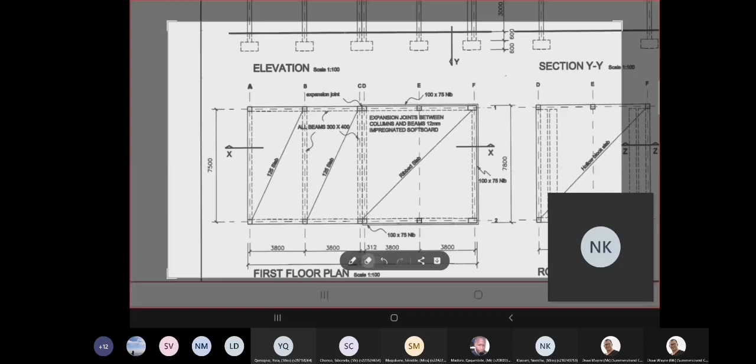The beam sizes, we can see, we take off the column. It says to us over there that all the beams are 300 by 400. What is the 300? The 300 is the width, and the 400 is the depth. That's given to us there.

We make our way further to the opposite side to where we have our trough slab, and on our trough slab we will then see, when we look at the detail of my drawing at my trough slab, that we have a deeper section over there, and that deeper section then shows us, because of my slab, what was the thickness of my slab that we had determined there?

The thickness of my slab was shown separately, where I had a 125mm slab, where I had my ribbed block slab, and I had a thicker slab on my trough slab, which is given to me, as I can see, as 300 thick. And the 300 thick I get over there.

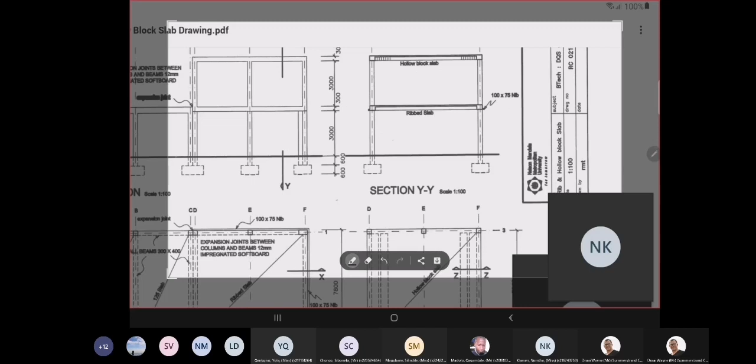So now I will work out my beams, and I will do my beams, and I can just go through. I can do collects, but there's no real need for me to really do collects, because yes, I can do the collects, but as I say, there's no real need for us to do them, as it is not that many that we are needing here. I'm going to go out, and I will go into my dimensions for my beams.

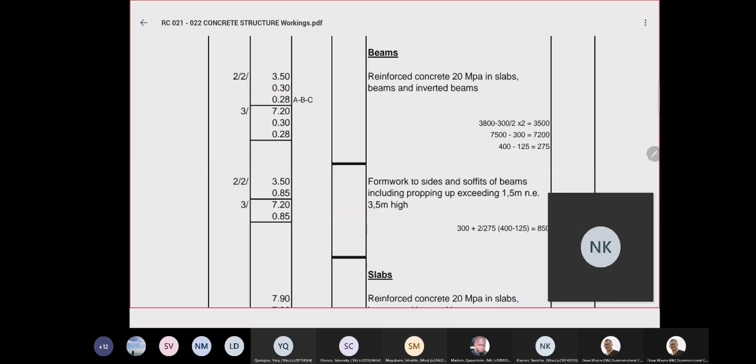There we can see my beams, and I say reinforced concrete, 20 MPa, 19mm stone in slabs, beams, and inverted beams. And just as a measure for whoever checks my work, I will now do the following. When I write that reinforced concrete 20 MPa 19 millimeter stone in slabs, beams, and inverted beams, I then underline it to indicate to whoever will be checking my work, so that person can understand that I am now measuring the beams. What is underlined will indicate to whoever reads or checks our work what it is that we are measuring, and here we're measuring the beams.

And I will now look at my dimensions for that. I'm going to go back, and I unfortunately have to go back to the drawing. I have to jump between these two, where when I look at my beams, first and foremost, I will work on the horizontal.

But now what do we do? We've taken our beam dimensions, we've measured, because our slab, where did our columns go? Our columns went to the underside of my deepest beam, right? So I want to measure this, and when I look at this, I will measure my beams from there to there.

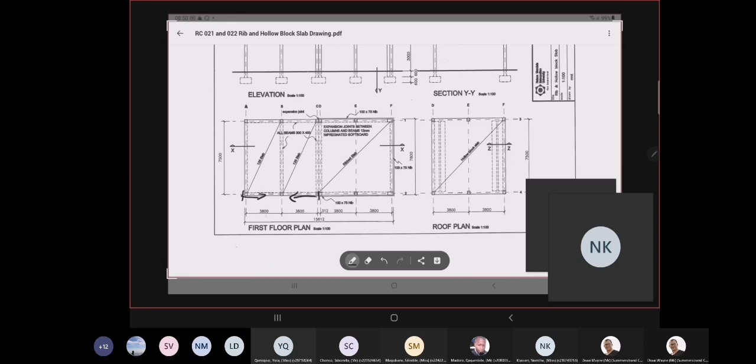What are my dimensions that I have? I see 3800 plus 3800. So if I have 3800 and 3800, that gives me 7600. So my overall length would be 7600 times whatever the girth of my beam is.

And when I look at the design for my beam, I notice that I know that slab is 125 millimeter thick, it is given to me from there. I know that this here is 300. And I also know that that over there is 400 thick.

So what is that? It tells me that it is the 400 minus the 125, which is the slab thickness, and that gives me 275. So it tells me, and I'm going to just write on this, fill the drawing here with my own notes. So I have 300, and I have 2 by 275. 2 by 275 gives me 550. That gives me a girth of 850. So it will be that multiply by that.

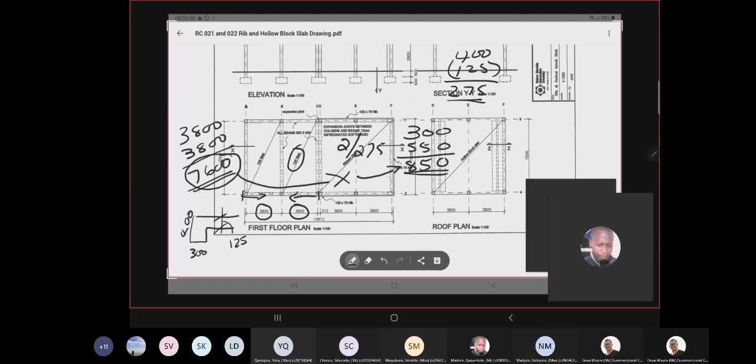Let's say it will be that, multiply by that. And we have 2 of those. All happy with that?

Can you see what I've done? If I now go in another color, just to show where exactly it is I'm talking about, that and that. And that is why we use pencil crayons to indicate. So that's now what I've done here. All happy with what I've done there? You can see that.

0.85 times 2, so I have, okay. Then I now need to also do, let's use a different color.

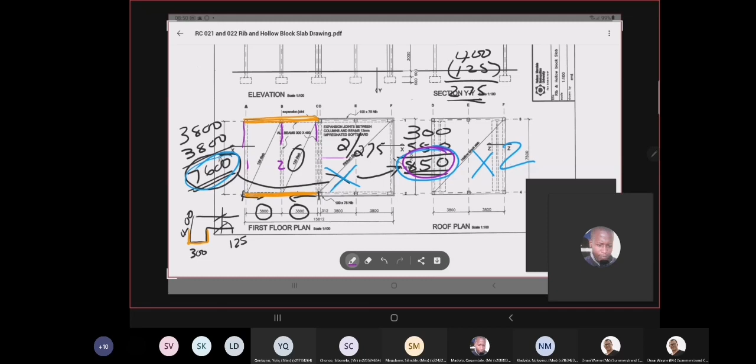But my girth is not the same over there, there, and there. In actual fact, my girth for that one, my girth for 3 would be different. Is that correct? Or would my girth be the same? Yeah, in actual fact, it would be the same that we would measure here. So my girth there would be the same.

So with those 3, what are my dimensions? I need to clear some of this stuff here. Okay, so when I look at this now, I have 7 meter 500. Where does a 7 meter 500 take us to? I have that 7 meter 500.

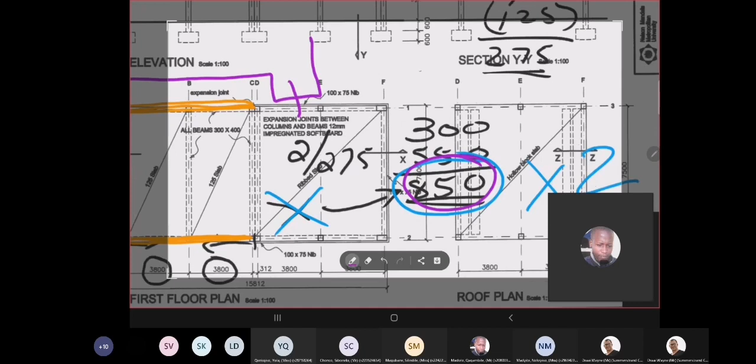That 7,500 takes me to that 7,500 takes me to the center of my beams. Can you see that there? If you can blow that up. 7 meter 500, does it take me to the center? Where does it take me to? To the center. There you can see. It takes me to the center of those beams. Right, so it takes me to the center of the beam.

So what is the size of those beams there? My size is 300. My size there is 300. So take it to the half. It's 300 divide 2. That gives me 150.

And I've got to multiply that by 2 again. So in effect, it is the 7,500 minus, oh no man, what minus? The 7,500 plus 2 times 300, divide 2. And that gives me 7,800. All agree with that?

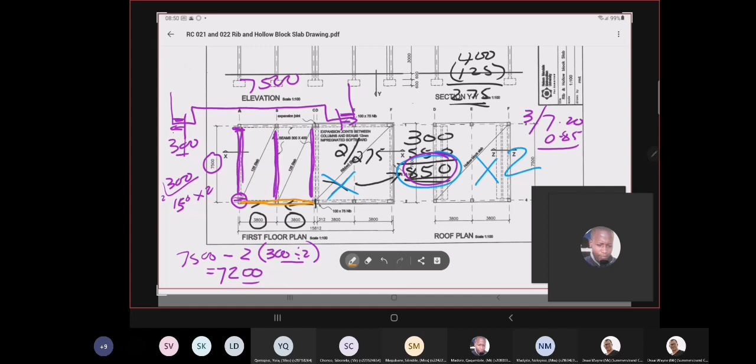Right? So I now would have covered that and that. That is what I would have covered. But when I look at this, I have covered, but what about that section there? And that section there, all the way around.

Shall I measure this here? Shall I measure this here with my sides and soffits of beams, or shall I measure it at another time? I can, of course, measure it right here. I can measure it here, whereby I would then, okay, if I can then just say the other one was, we said 7 meters 600, right?

7.6 times 0.85, and that was times 2. My beams in the orange. Right? I can now go in and I can say, right, it is 7.2.

No, do it elsewhere. I can say 7.2 by 0.13 by 2. And I can say 7.8 by 0.13 by 2. And that will then take care of that section at the edge of my slab all the way around. Are we happy with that?

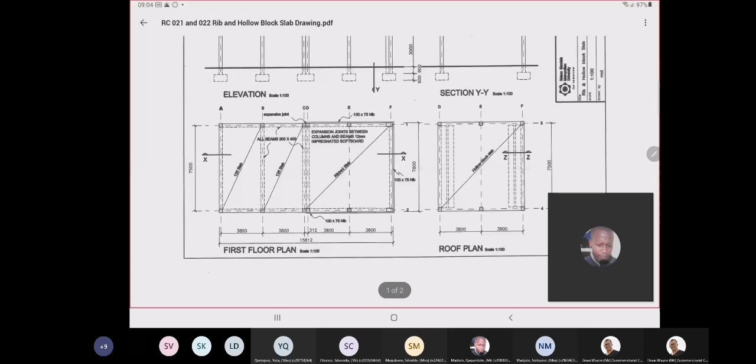I'm just putting it together there because all of that refers to the 125 ribbed slab. It refers to that section because when you look at the drawing, when you look at this section further, when looking at this section on the drawing, you would notice that here I have the beam, but I have no beam that side. That side, it's just a slab. Okay, that's just a slab. So I dealt with everything on this side where that refers to the beam, and that's why I've done it there.

But you can keep it separate. You can come back later and measure that like how we've done it previously. It does not matter, as long as we bring all of those elements and sections that belong together when we do the squaring and preparing for the bill. I hope that answers your question, Madolo. Yes, no, it helps. I just thought it looked faster to just combine, but I understand your reason now.

You see, so I'm showing different ways of how you can do it. You can do it there, you can keep it separately, it is entirely up to you as to where you want to do that in. Okay. Understood, sir. Thank you.

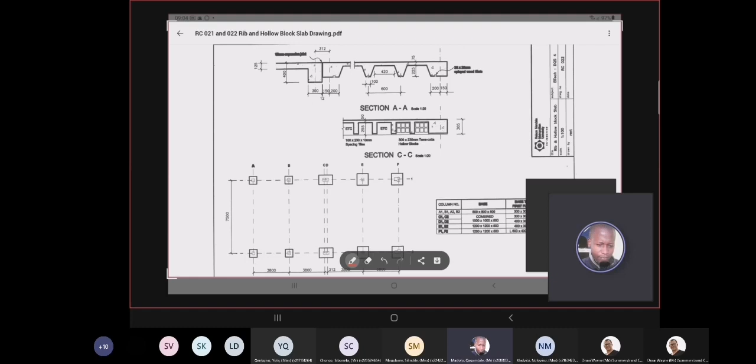Okay, so what I've done, I've just done everything over there for the beams, because on this side we have no beams. Okay, that's how we have no beams. So we finish everything on that one side, and because the two slabs are separate, are different, when we also go in and we will now measure the slab for that section.

We will now measure that slab and indicate on that slab: reinforced concrete 20 MPa, 19mm stone in slabs, beams, and inverted beams. This time we will underline the slab section. But we also need to take into account, going back to my previous section, the category of where my beams would fall in. I notice the height there is 3000.

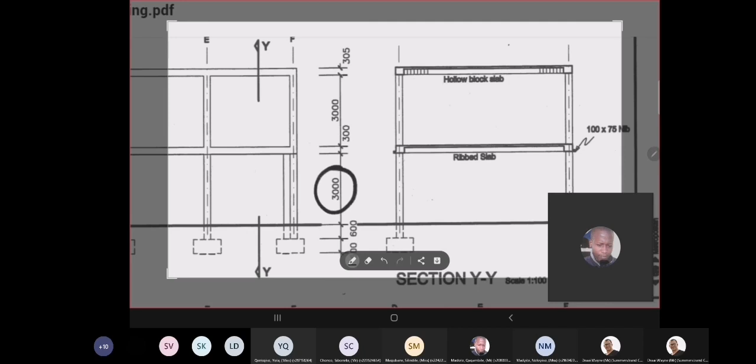That is from reduced level. The height is 3000, and I know my beams are 400, so it will fall in the category of exceeding 1.5 and not exceeding 3.5 meters from bearing level. What is my bearing level? That there is my bearing level. My bearing level is the ground level, and it's 3 meters, so it falls in the category of exceeding 1.5, not exceeding 3.5 meters from my bearing level.

For the columns, we measured my bearing level. Where do we measure my bearing level from for the columns? We measure that from there. Right. And now we're looking at the slab, and we look at where it is that we will be working from. I will measure my slab over my beams, and I have my dimensions here.

We said that dimension there is 7,500 plus 300. No, not deduct. 7,500 plus 300, so it's 7,800, and we'd multiply that by the 7,600, which is made up of the 3,800 plus 3,800, which gives me 7,600. And with my thickness there, 0.13.

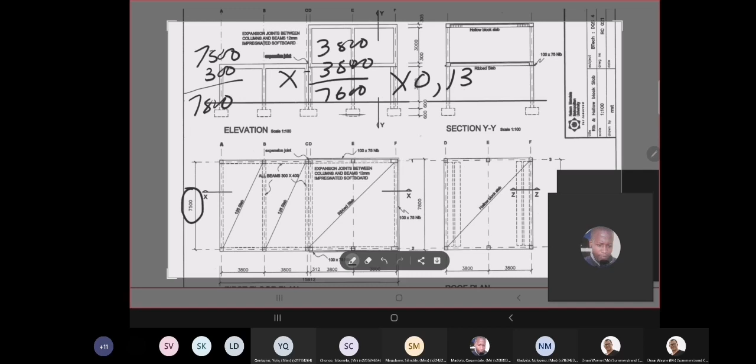The dimension there is, yes, it's a 3. If I go in and blow this up, I'll just pick this up here now. If I blow this up, it shows that this also goes to the center, meaning that I would also have to add 2 times 150 on there. So I need to say 2 times 150. That then brings that to 7,900.

I made a mistake, and my apologies for that, guys. That dimension there is 7 meter 900, and it means that the overall length here would then be 7,900 multiply 0.85 times 2. That is for the beams. And also the 7.90 multiply 0.13 times 2. My apologies, guys.

I hope that you understand what it is that I'm pointing at here. I have not taken the dimension there shown that the dimension goes to the center of the beam, and I disregarded that. I did not take that into account. You guys with me? You guys see what it is I'm talking about? Please show by a thumbs up or raise your hand if you have a query, if you're not happy with that. All right, thank you, guys.

My apologies once again. So my dimension for my slab, the reinforced concrete slab 20 MPa in slabs, beams and inverted beams will be 7.9 by 7.8 by 0.13.

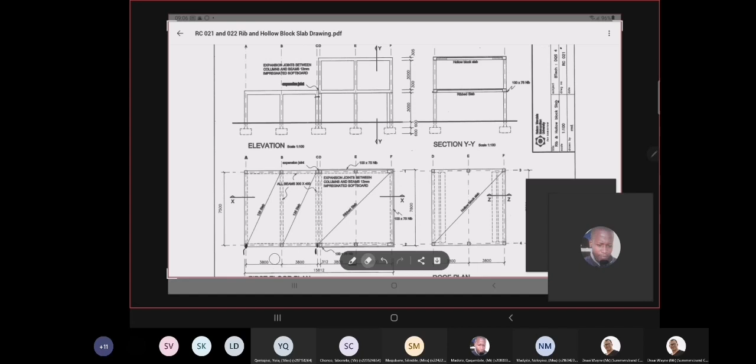And we then have to look at the formwork to that. The formwork to the soffit of my slab, including propping up, exceeding 1.5, not exceeding 3.5 meters high, would therefore be, we would then use the dimensions that is shown as 7.9 by 7.8, and we would then deduct.

We'd go in and we'd say deduct ditto. And what will that ditto refer to? The ditto, because we would be measuring over there. That is where I'd measure from for that dimension there. It is for the section, but I also need to deduct, and I'm going to change the color of what it is I need to deduct.

I don't need to deduct that. I need to deduct that. Whatever is marked in purple, I need to deduct that. Why do I need to deduct that? Because I have already measured the formwork to the sides and soffits of my beams. So I now need to deduct that from my dimensions of my slab, because otherwise I'll be over measuring.

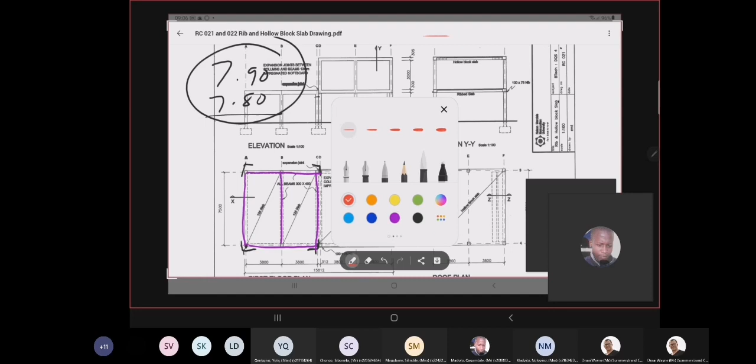So what are my dimensions that I do have? What we will be deducting, oh, let me do that in red. What I will be deducting is the following: it will be the 7.9 by 0.3 by 2, and it will be a 7.2 by 0.3 by 3. That is what I will be deducting from this dimension here, the dimension of this for the soffits of my slabs. That is what I will be deducting. All clear on that.

And my dimensions there would fall in the category of exceeding 1.5 and not exceeding 3.5. Okay, that is that.

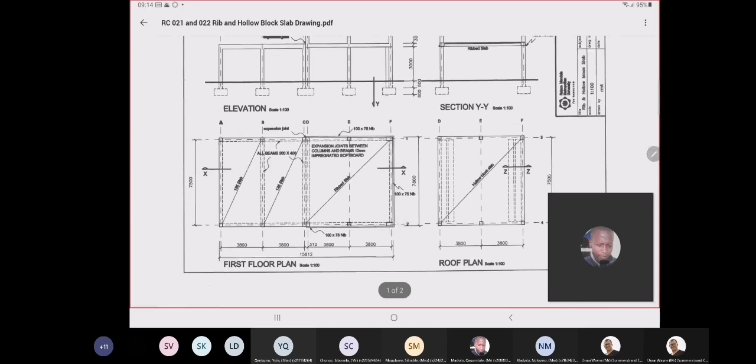I now need to measure the ribs because this is a ribbed and block slab. It is a ribbed and block slab, and the information given to me, I will find over here. It tells me that that is a ribbed and block slab. No, that's not a ribbed and block slab. That is just purely a straightforward concrete slab, reinforced concrete slab.

So when I go over to my other side, to my next side, this is where I would notice the following: that I have over here my trough slab. So now I see we have three different setups of slab. So when we go in and we measure for my trough slab, we will go in and we will have a look at how best it would be to measure this. When you state this, that it will be the following in trough slabs.

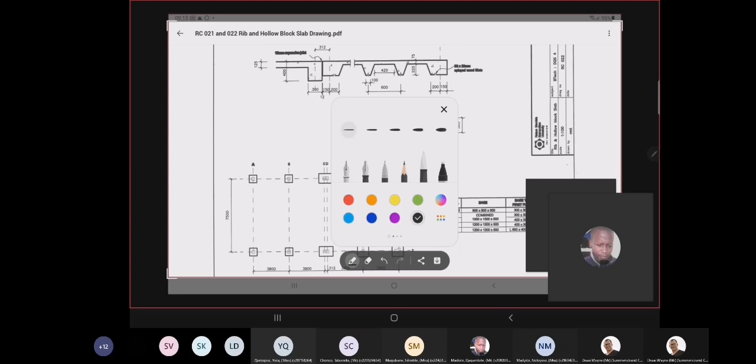The following is trough slabs, referring to the reinforced concrete in this slab. That slab and the thickness of that slab is 300 millimeters. In that slab, when I show this on the drawing, it will refer to that slab over there.

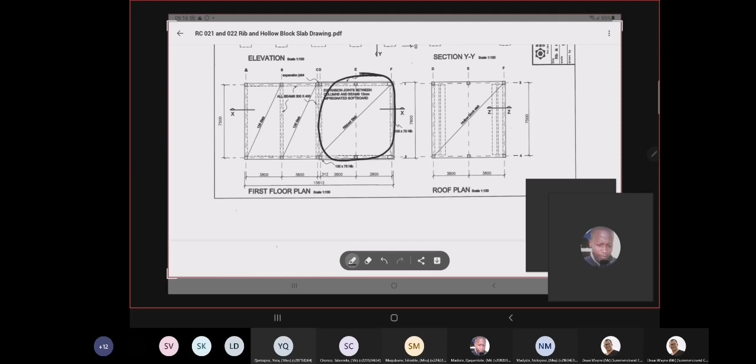My trough slab, when I now go in and measure that, my description would read reinforced concrete 20 MPa in trough slab, including beams and inverted beams. I have to state that. So my overall dimension for this slab, when I look at my dimensions and blow this up, I'm sitting with the same scenario where I now have to measure from there to the outside there.

And again, it would now be 3,800 plus the 3,800, and then also plus the 300, because those dimensions take me to the center. And the same dimension to the other side, so it would be my 7,900 multiplied by my 7,800, multiplied by 300.

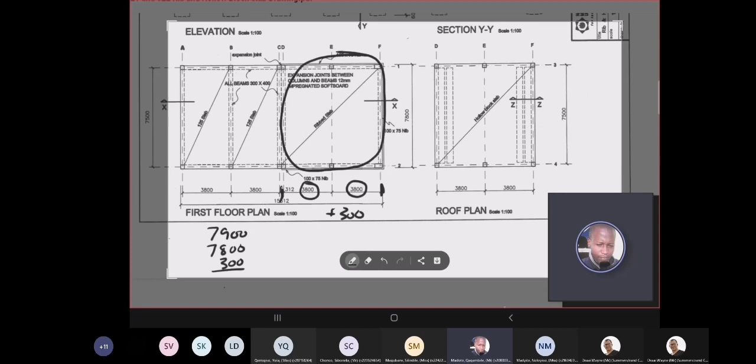Excuse me sir, yes Madolo? The 312, that is next to where you have circled your 3,800. The 312, yes, what does it refer to? Let's go in and have a look. If you see where your two different slabs are meeting, there's a 312 over there.

That gives you your centers. It's not 300. Can you see my drawing there, Madolo? Yes, that 312, I'm asking about that. Now what does that 312 refer to? That 312 says that the distance from the center of this beam to the other side there is 312. Okay, what does that refer to? The distance between the two centers, it just gives you the distance between the two centers.

Yes okay sir, understood, you see that? Because this beam is 300. Yes, you with me? Yes sir. And so that 312 is just there to show that it's a distance between the two centers.

Yes, and the beam on the other slabs, I see a 150 and a 200 there. That's sure, 150, that just shows the dimension. The 150, 150 and the 200, and remember later on where we will now start measuring between the centers when we measure for our trough, to determine what those centers are, what we would add on either side. Remember that then comes into play there.

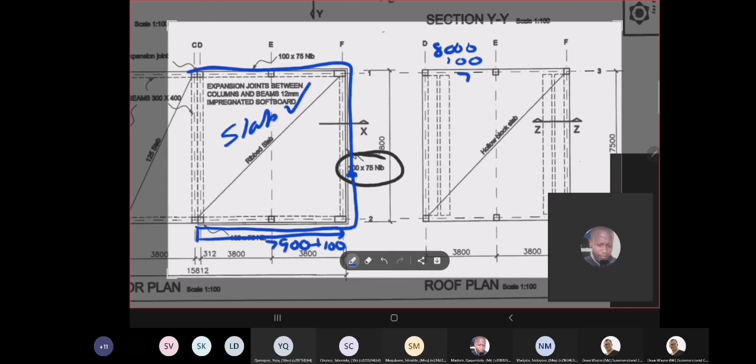So it will be 8 meters multiplied by 0.1 and multiplied by 75, and we have two of those. If we rewrite those, it will be reflected as follows: 2 times 8 meters for my nib, times 0.1, times 0.08. And that will take care of that nib that side and that nib on the other side.

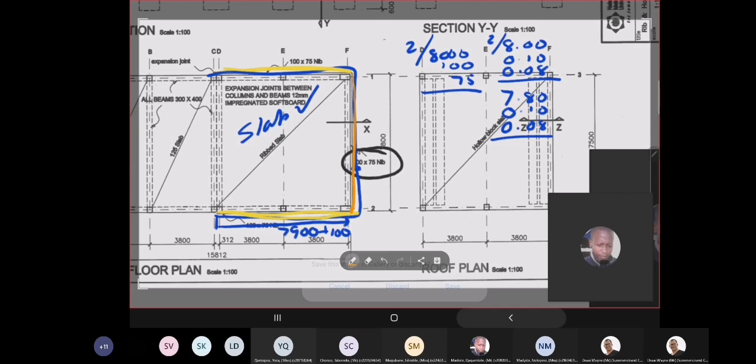I then go in between, and what are my dimensions as I go in between? My dimensions going in between would now be as follows: for my vertical, it would be 7.8 by 0.1 by 0.08, and that will refer to that nib that goes in between. It's also concrete, remember, it's the same strength concrete, the same size stone concrete, and it forms part of that slab. So, but now I need to deduct for these troughs.

And I need to deduct for these troughs, those. I need to deduct for those troughs in there. And how do we arrive at those dimensions for those troughs? How do we arrive at those dimensions when looking at those troughs?

I take my dimensions and I have my overall dimension of 7 meter 800. But all of you remember the question you asked me about that 350. Yes sir, now this dimension.

You will have that all the way around your slab, if that is the slab. You would have that 350 all the way around with your troughs as a soffit, almost like a beam that is being created. Okay, now I see. So that 350 would be all the way around.

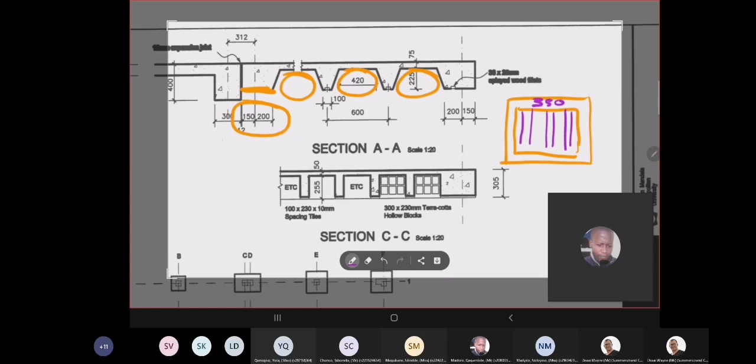So what do I need to deduct for the length of those troughs? I have my overall length of 7,800, and I need to deduct 2 by 350. Deduct that, it gives me 7,100. So the length of my trough is 7,100. And what is the dimension for that trough?

What's the dimension for that trough? I now know that over there it is 420, and over there it is 600. So if I draw my

trapezium, it will therefore be 420 plus 600, divide by 2. That gives me 1020 divided by 2.

No, whoops, not that. It's not 600, it is 500. Why 500? Because 600 takes me to the center and it shows that that is 100 and 100. So I will have to say 600 minus 2 times 50. That's in the center.

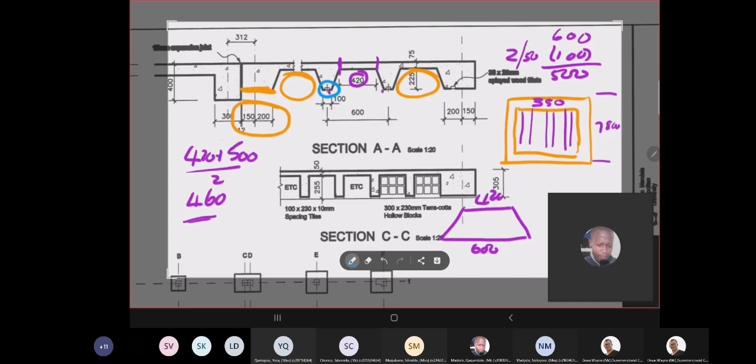Referring to this section over here, where the 100 shows me the width of the beam, and it also shows that the 600 goes to the center of those beams. So I need to get the dimension to there and there, which is then between the two blue marks, which is 500. So this is the 420 plus the 500 divided by 2 gives me 460.

And when I show the deduction of what it is I need to do, I've determined that it is 7.1, the length, multiplied by 0.46, and I have my depth there given to me as 225, and that is 0.23. But how many do I have? How many of those do I have?

In order to determine how many we will have to show, in order for us to show how many we will have between that line and that line, I will have to deduct, or I will have to take my overall dimension, which we had as 7,900.

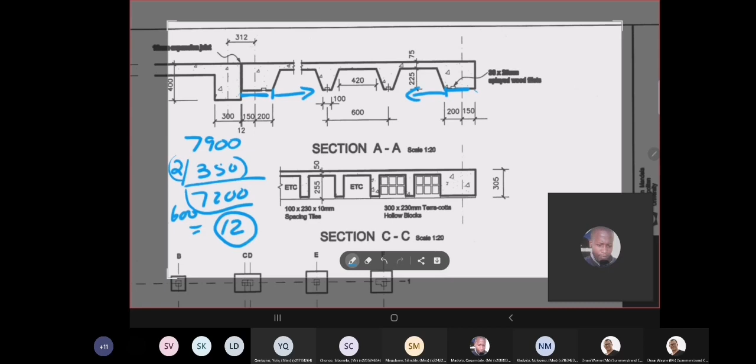Because I was not given how many troughs we have, I will have to determine that, and I can determine that because the 600 given there is given to us from center to center. If we were told how many, we could have used all those dimensions to add, like how we would have used that with our ribbed section. So it is 7,200 divided by 600, and it gives me 12.

So my dimensions that I will be using here would be 7.1, 0.46, 0.23, and I would have my deduction of 12. So we have 12 troughs that I will deduct from there. Right? Let's go.

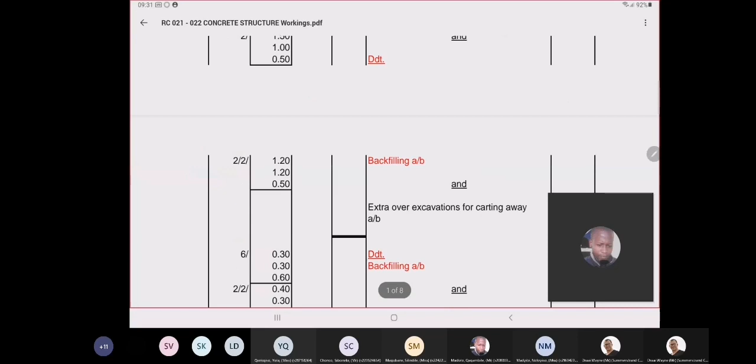So when I now work with that, I've now done, and I've now sorted out the concrete that goes into my trough. For the formwork, I'm going to go out to the working for my formwork. It shows us there that it's formwork to the soffit of the trough slabs exceeding 250, not exceeding 500 millimeter thick, including the rib size of 100 millimeter wide.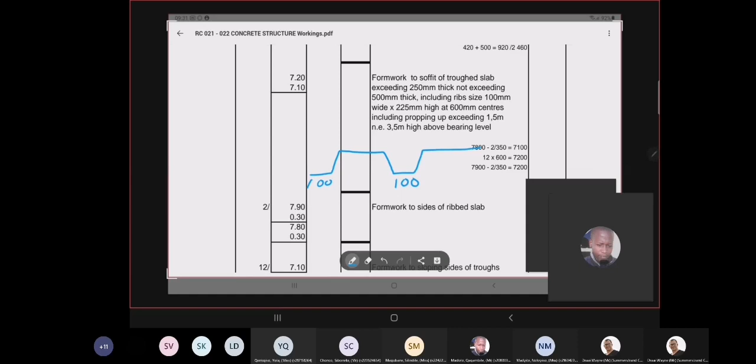Where do I get that rib size of 100 millimeter wide? That is given to me on the drawing, it shows as 100 millimeter wide by 225 millimeter high at 600 millimeter centers. So that tells me that that is 600 millimeter centers, including propping up exceeding 1.5 and not exceeding 3.5 meters high above bearing level.

And then I'll go in and I need to determine what this area is. I'll then have to work out exactly what the area is of this for the formwork. Because I can then see there that I take my 7m800, which is my overall dimension, deduct the beam, if I can call it that, or the solid section all the way around, which is 350 by 2, it gives me 7,100. And the 12 by my 600 gives me my 7,2 that I had.

So meaning that it will be the 7m200 multiply by my 7m100. Or I can of course also show that up as it is shown over there, where I take my 7m900 minus 2 by 350, just to show that that is how we've arrived at it. I can take my 7,800 minus my 7, as I indicated earlier.

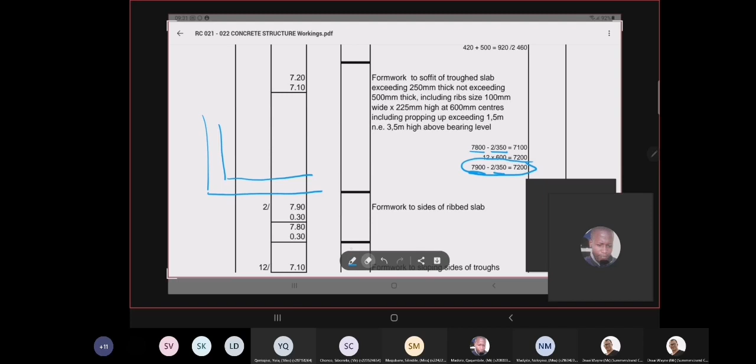I have my 350 all the way around, and that is 7,900, and that is 7,800. So I deduct the 350 times 2 from those two. That will give me my 7,200 multiplied by my 7,100 for the formwork.

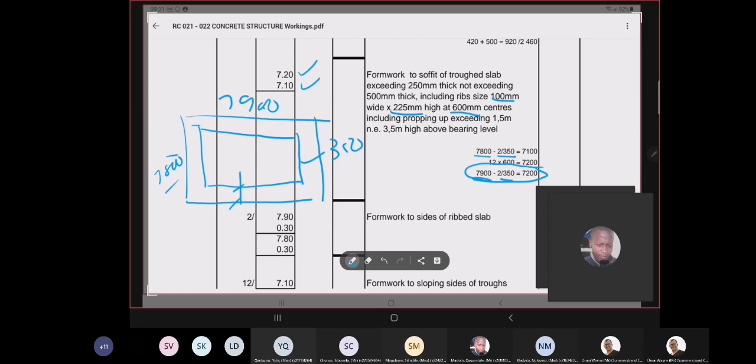Remember, it's important that we give the size. We tell what the centers are, what the height is, the rib sizes, and all of that when dealing with my formwork to my trough section.

And we will also now, for the sides of that rib slab or that trough slab, have our dimensions that we would have. Now you see that it shows here 7 meter 900, which is 7 meter 900 multiplied by 0.3 by 2.

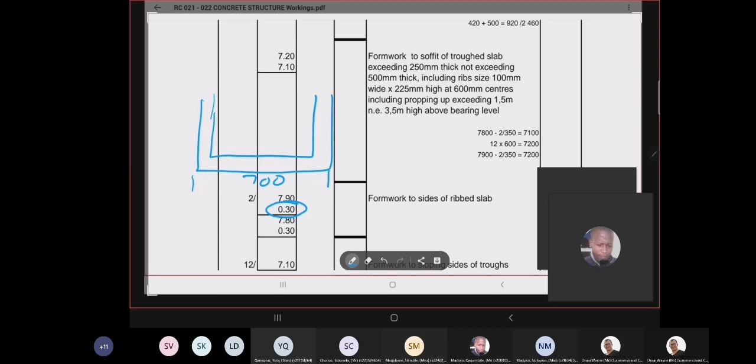Why 0.3? Why not 0.35? Anybody tell me why not 0.35? And why it reflects as 0.3? Anybody? Why do we have 0.3? It's very important for us to understand why we're using 0.3.

What were the dimensions that we had indicated for this trough? How did we describe this trough? We said that when we dealt with the formwork, the rib size is 100. Right? So what do we do?

Yes, we have that shown to us as 350. But where does it stop? Where does it start? What is that dimension there? It is 50 millimeter. Do you agree with me? Yes, that is 50 millimeter. And what does that 50 millimeter form part of? It forms part of the formwork to the trough.

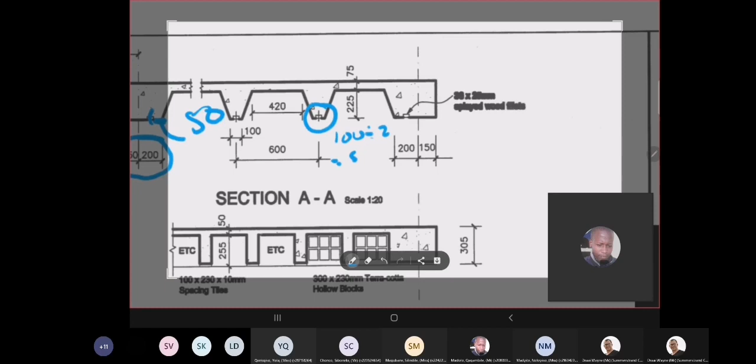Because we have 100 millimeter there. Part of that formwork to the trough is 50 millimeter. It gives us 50 millimeter there. That in itself tells us that we have the 350 minus the 50, that leaves me with 300 as my width all the way around. Are you with me?

Yes, sir. So my dimensions there therefore refer to that, and what it then says is on my horizontal, I would then have the 7 meter 900 multiplied by 0.3, and there's two of them because the two of them would then refer to that and that side. The 7,900 times 0.3, there's two of them, and then we have 7,800 times 0.3.

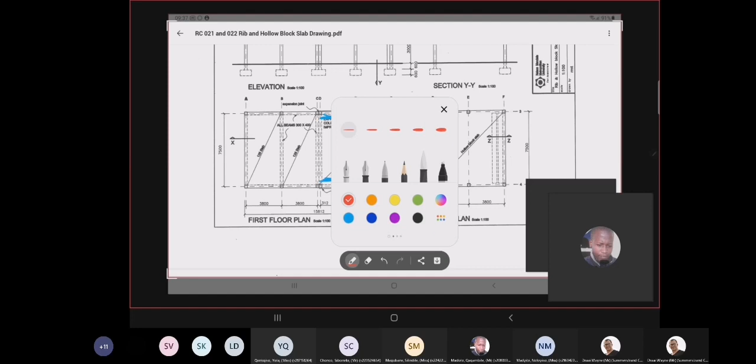Must 7,800 not say times 2? Does it reflect times 2? Must it reflect times 2 if I have a look at this drawing here? I think it should say times 3. Times 3? I think so. No, let us have a look at this.

What is my description there? It says formwork to the sides of my ribbed slab. We'll refer to that, and to that. Now, where does that show on my drawing?

Shows that my thickness there is 225, plus 75 gives me 300. So that is the formwork to the sides of that.

And how do I do? What do I do? Where do I measure the formwork to the solid sections? Do I measure that? Have I measured the formwork to this here? Have I measured that formwork? I've not measured that as yet.

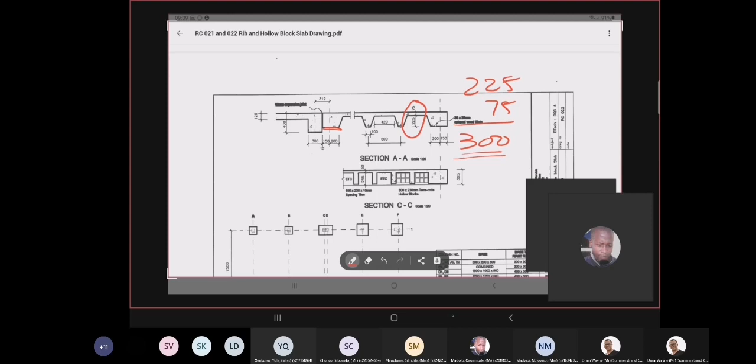So when I deal with the formwork to the sides of my trough slab, it will be the thickness that we are given, that we know is 300, and it will be at 7 meter 900 there, and 7 meter 800 that side. I've already measured that, that is done. We said that it goes up against the expansion joint, where we do not have to worry about measuring the sides there, because that is already measured over here, because that will go up against the existing slab there.

So formwork to the sides of my trough slab would therefore refer to the section on the side there only. And that's for my vertical.

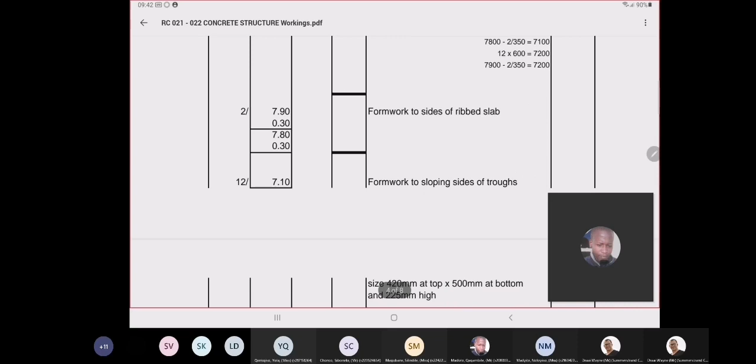Then I have my formwork to my sloping sides of the troughs, and the trough size is 420. We indicate the trough size that we give. When I go back to my workings, the formwork to my sloping sides of my troughs has a size of 420 at the top and 500 at the bottom, and we're giving the height. And we've determined by our calculation earlier on that we have 12 of those troughs. That's for formwork to my actual troughs.

We have the formwork to the soffit of the adjacent section. Adjacent flush surfaces, including the propping up, exceeding 1.5, not exceeding 3.5. We've already measured the overall dimension, so all we do is take that overall dimension and deduct the trough sides that we've measured. It's a 7.1 by the 7.2.

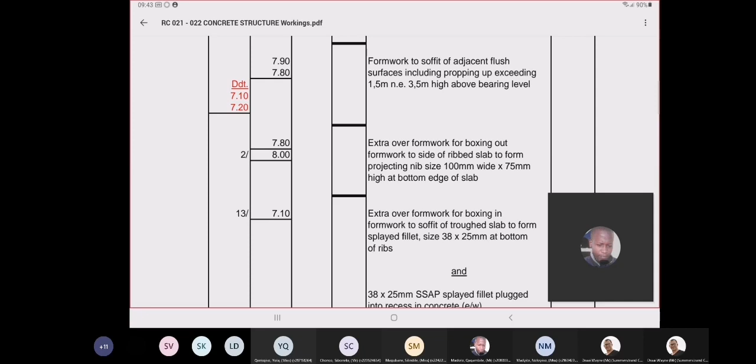That is a deduction that we would then ensure the remainder is taken care of. Now for my ribs, or my nib, the boxing out, we need to measure the boxing out, and the standard system tells us that measuring boxing out would be referred to as extra over.

Formwork for boxing in formwork to soffit of the trough slab to form a splayed fillet, size 38 by 25, at the bottom of the ribs. Where on earth? What is it talking about? Extra over, formwork for boxing in formwork to the soffit of the trough slab to form a splayed fillet, size 38 by 25, at the bottom of the ribs, and we also now measure 38 by 25 millimeters sawn South African pine splayed fillet plugged into the recess in the concrete elsewhere measured. What are we talking about? Let's go and see what it is that we are talking about.

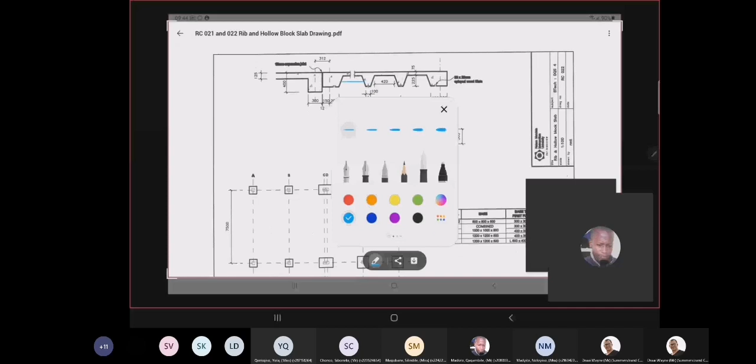Let's go and see what it is we're talking about. If we have a look at over there, and I will blow that up, that tells me 38 by 25 millimeter splayed wood fillet. See that there? And that splayed wood fillet goes into each and every rib of my trough slab.

That's where that description comes in, where we need to measure extra over for the formwork for the boxing in of those ribs, and it goes into each and every one. You can see there where we're all over. It goes on each and every rib or nib, so each and every rib.

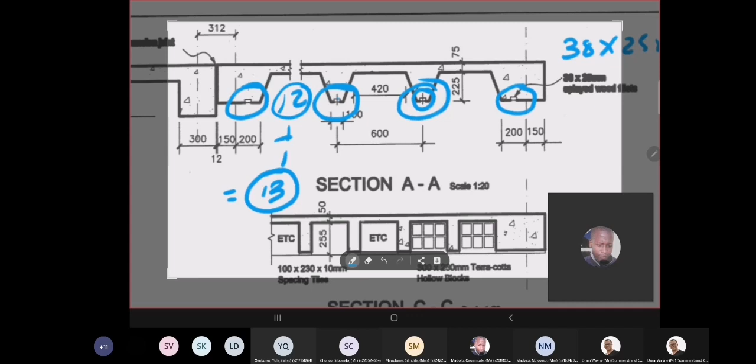Now, how many troughs do we have? 12. Meaning that we have 12 troughs, and that we should have one more of this boxing in splayed fillet, because we had 12 troughs, and the 12 troughs would refer - like if you hold your hand out, you should see the web between your fingers would be the trough, and the ribs would be your fingers. So if we have 12 of those, we would add 1, and that will give us 13 ribs or 13 splayed fillets that we would then encounter over here.

So my dimension there would be my length that I've given, the length that I have arrived at from using the 7800 and deducting the 2 by 350, which is 700, giving me my length of 7100, and I have 13 of those that we have over there for the boxing in - 13 of those with the extra over, measuring for the boxing in and also measuring the fillet that we need to allow for over here.

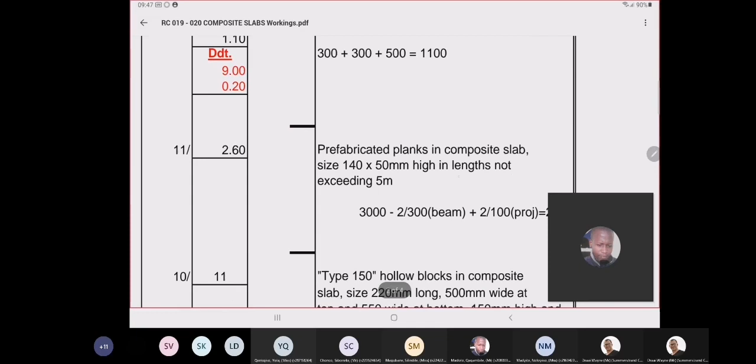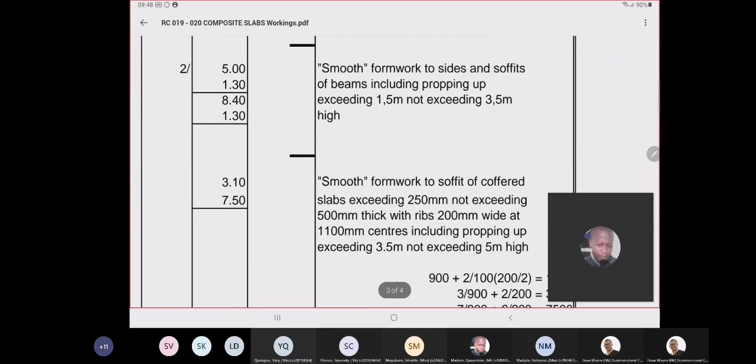Where's my fillet now? Oh, where am I now? Why haven't I missed my - no, I put the wrong drawing. No wonder.

Okay, then between my two slabs, between my 125 and my 300 millimeter thick slab, we will now have our impregnated soft board. The soft board is the expansion joint between the two slabs. Why do we have an expansion joint there? Because for any movement that should take place, it should be taken care of. And I have the 12 millimeter impregnated soft board in expansion joint between the beam and the adjacent slab, not exceeding 300 millimeters high, and that runs along the entire length of my slab, so the length there is 7 meter 800.

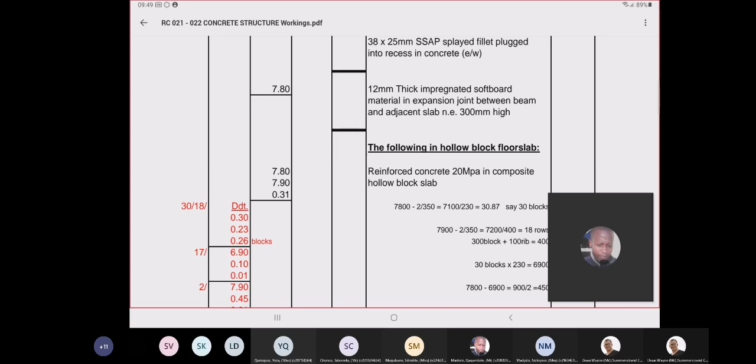Okay, and this is where things start becoming interesting now. Because going into and looking at my drawing, and taking us back to last week to where we had measured the columns - I said that, and Madola still gave me the answer. I said that we would then keep these columns separated from these columns. You remember that?

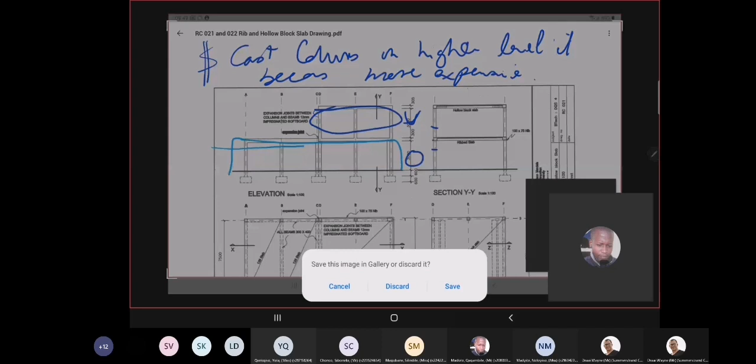And you said that the reason for that is because of the cost. You said that when we cast columns on a higher level, it becomes more expensive to cast columns over here than what it is to cast them down there. So it means that we measure for the columns on the two different levels separate from one another. Does that make sense? Makes sense for us to do that? To me, it makes a lot of sense - I think of Bob Marley's song, all this dread rock rasta, makes a lot of sense.

So I will now look at us measuring the columns up there first. And when we measure the columns to that top section, we now first and foremost need to determine what the length of these columns would be, what would those heights of those columns be, because these columns would now be placed from that level on up.

And I look at my drawing, when I look at my beams first - when I look at my drawing and I look at my beam sizes and I look at my slab at the top there, it tells me that I have a hollow block floor slab. Excuse me, I have a hollow block, and the thickness of that is given to me as 305.

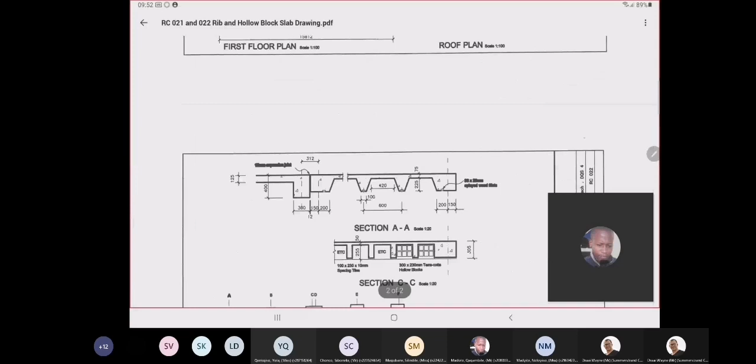Thickness there is given to me as 305. The height of my columns is given to me as 3000, but I now want to see what the section indicates, what the details indicate to me there. It shows there that I have 305, and I will then have to just work my columns that come below that, and that will be supported by the deck below.

And how many columns do I have? I look at my drawing. I want to have to look, and I notice that I have six columns. All see the six columns. Where do I get that from? I see that I get shown that this is the roof plan down there.

And I know that my column heights are 3 meters. And what does that mean? It means that my columns will all be in the category not exceeding 3.5 meters from bearing level. What is my bearing level? My slab is my bearing level.

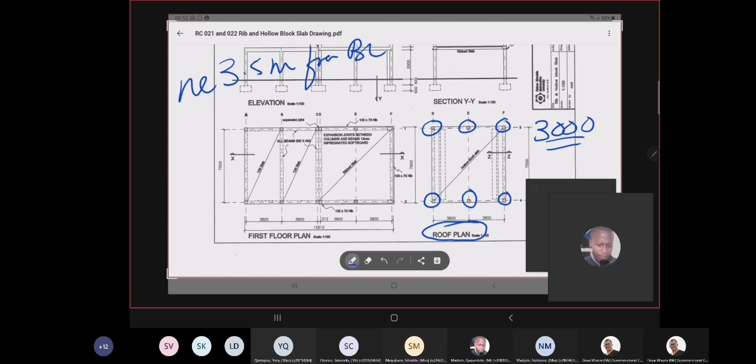So for my columns, I'll first and foremost go in and I'll measure my rectangular columns not exceeding 3.5 meters high.

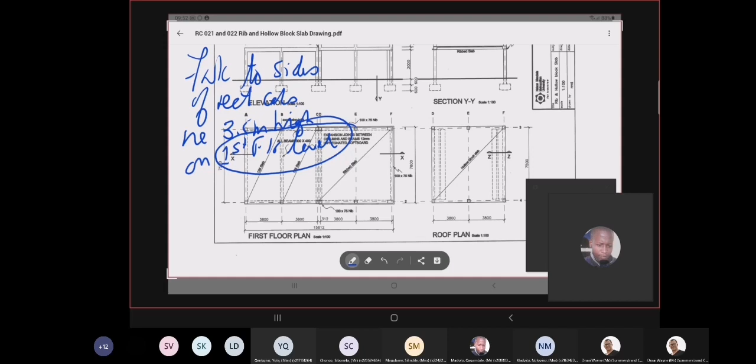So because I'm saying that it is on first floor level, the contractor will then know that that is where we're going. And what are my column sizes? What were the column sizes that we were given? Were all the columns at 300 by 300, or what were the column sizes?

First, we said that all the column sizes on the one side, if you can remember from last week, all these columns were 300 by 300, and these were 300 by 400. Does my memory serve me correct? Is that what we dealt with? Can you not remember? Is it too far gone?

Well, I can remember that. But my columns up there would be 300 by 300 on my first floor level. So I will therefore have a dimension of 4 by 300. That gives me 1200, and my dimensions for my formwork would then be 1.2 by 3 meter by 1, 2, 3, 4, 5, 6 of.

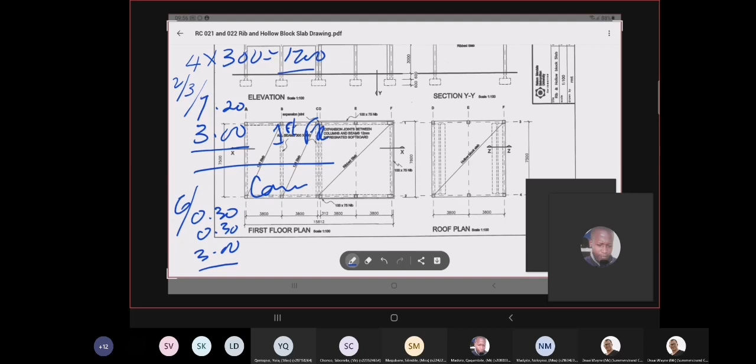And the concrete in those columns would be the exact same, would be reinforced concrete 25 MPa, 19 millimeter stone in my columns, and that would there be my concrete would then be 0.3, 0.3, 3.0 by 6 of. That's for my concrete. On that level, important, first floor level, it comes at a different cost, and we need to keep it separated from ground to first floor up.

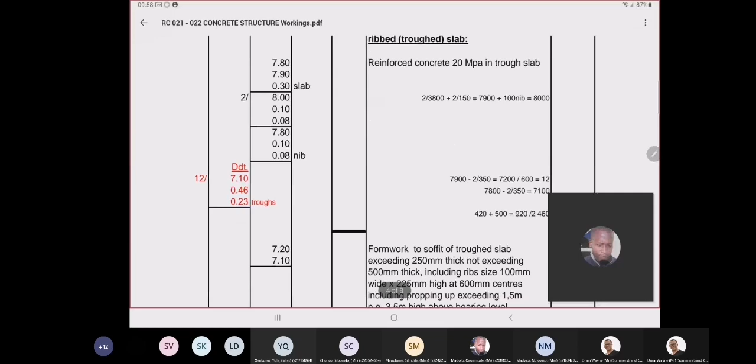So now I need to measure my slab that is supported by those columns that I've just measured. And in that, we would then show that it is the following in a hollow block floor slab.

So I'm now going to deduct, that is my slab thickness. My slab thickness is there. My slab thickness we know is 305 millimeter thick. So that 305 will give us the 0.31 in thickness as a measurement in meter.

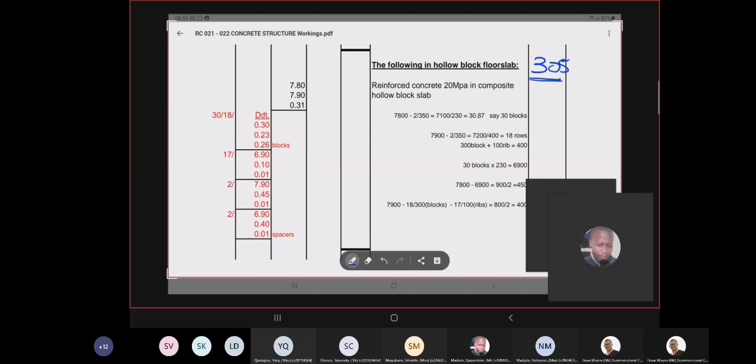But I'm going to deduct for all the blocks that I have. Now I'm going to deduct for all of those, and we need to now have a look at exactly how we will go about doing this. What do we need to deduct? How many of these do we have? I first and foremost need to decide and look at what the block sizes are that we are given. I will go back to the drawing in order for us to see that.

When I go and look at this section, I have a look at that section shown to us there. And I look at this drawing and it tells me that I have a slab of 305 millimeter thick. I have that concrete, the top section given to me as 50 and 255, the depth of the height of the block. It also shows me that my blocks are 300 by 230 millimeter terracotta hollow blocks. That 230 would be the length thereof. It also shows me that I have 100 by 230 by 10 millimeter spacing tiles.

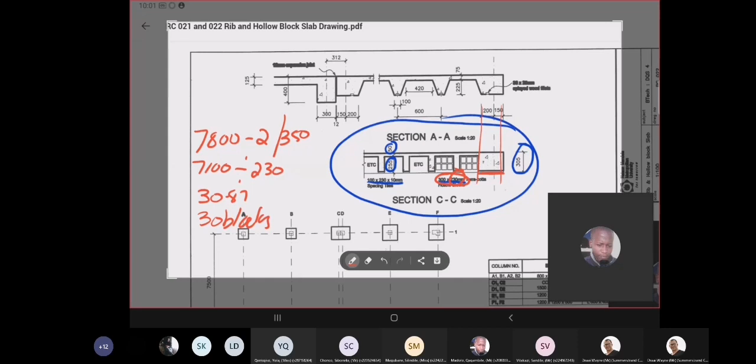And I also need to determine how many rows I have. Remember that we have 30 blocks. I need to determine how many rows I have. And for the rows, I will now use the opposite dimension, which is the 7,900. And I will deduct my 2 by 350, and that gives me 7,200. For my 7,200, I will now divide by 400.

But why 400? Where do I come on the 400? Because the width there, from there to there, is 300, and my ribs are 100. I need to go into the center there, so I add 2 by 50, and that gives me my 400. When I divide that, it gives me 18 rows.

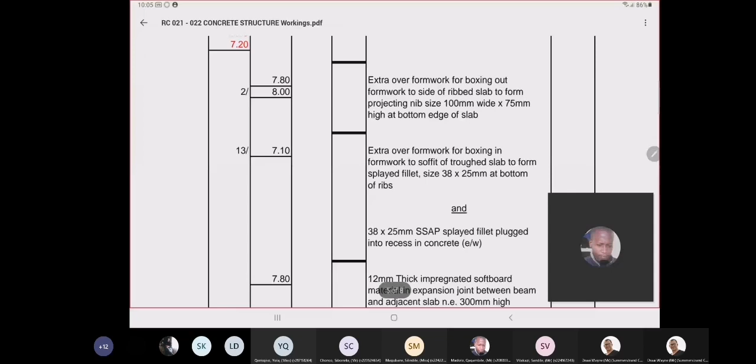So whatever I do in my deduction here for the blocks, I will work on the size of my blocks that I'm given as 300 by 230. I will then say whatever my dimension is, and the dimension that I've just worked with, where I have my block sizes given to us, and I've been given the depth of my block sizes as 255. So it will be the 0.3 by 0.23 by 0.26, because that is 255. And if I write that as a meter, it'll be 0.26, multiplied by my number of rows of 18, and multiplied by the number of blocks per row, which is 30.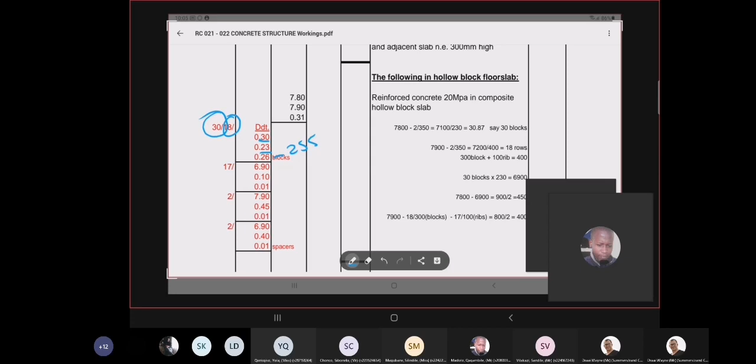So it will be my 6 meter 900 by the 0.1. Where do I get that from? By 0.1 by 0.01, and I need to go back to show where I have that from - information that I was given, these spacer tiles. In the spacer tiles that we have here, it refers to the 100 millimeter, which is there.

Oh, maybe I should use a different color. The 100 millimeters, which is there, the 10 millimeter thickness, and that is also under my blocks, and that is why we have the 6 meter 900. It is taken from the 30 blocks multiplied by 230 millimeter thick, gives me 6 meter 900. My length multiplied by the 0.1, which refers to that, and multiplied by the 10 millimeter thickness. And there's 17 of those that we would have all the way in between.

I also need to deduct, and I need to look at my length of 7 meter 800. I deduct the 6 meter 900 from that overall length, which gives me 900. It leaves me overall with 900, and this is now on the sides where I have to go in and determine exactly where we need to measure for these spacing blocks that we need to deduct.

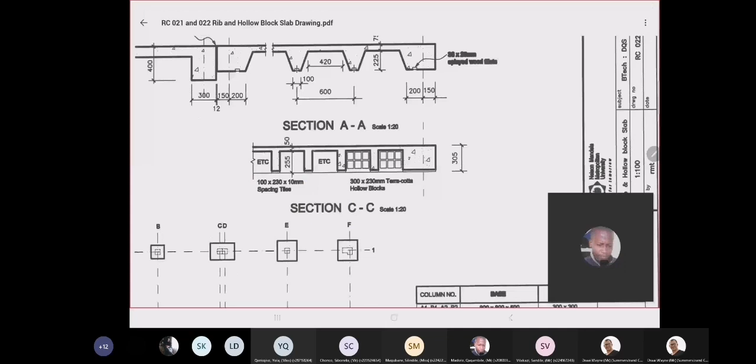The 30 blocks that we had multiplied by the 230 gave me the 6,900. So we take my 7,800 and deduct the 6,900. That then gives us 900, but because we need to work on the other side, it is 450.

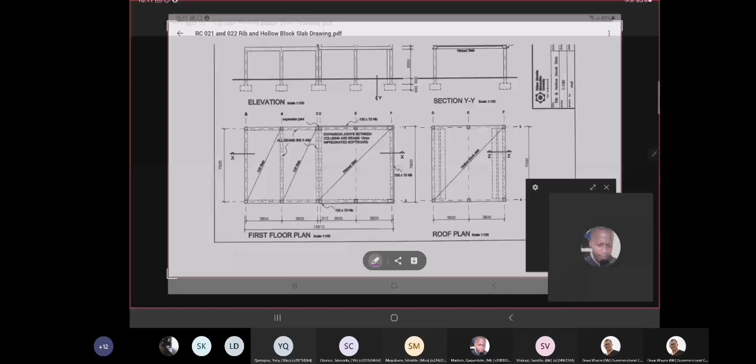So it is over this length, of my 7 meter 900, where I will have what goes in between, where the 450 would be on either side.

The 450 would be on either side there, multiplied by the 0.01. Because that 10 millimeter is where the spacer tiles will be, and we will not have concrete in there.

And in the opposite direction, we would have in between - the opposite direction, you would then have that from there - the 7,900 would be for that section there, and in between the 450, or the 400 in between, taking that into account with our spaces that we would have.

To then deduct concrete in there. As you can see, the dimensions, if you take that 6.9 multiplied by 0.4 multiplied by 0.01, it's almost negligible. It is 0.06 of a cubic meter. Very little, but we need to take that into account.

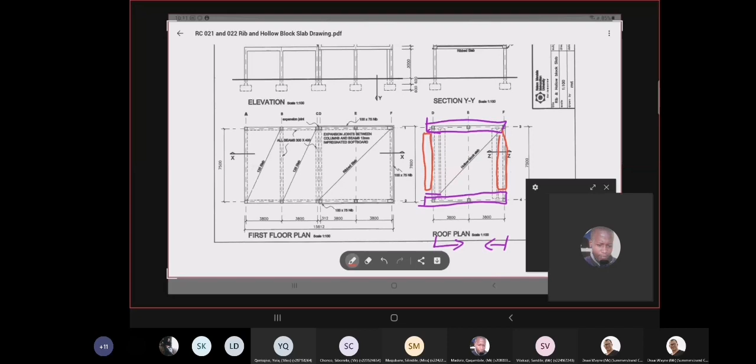So the spaces, the spaces being the 10 millimeters, the spacing tiles being the 10 millimeter underneath there, it's important that we make note of that.

So then, the formwork to the soffit of that slab, of that hollow slab - the formwork to the soffit over the hollow slab, or composite hollow block slab exceeding 250, not exceeding 500 thick, including the propping exceeding 1.5, not exceeding 3.5 meters high above bearing level.

We would have our dimension, which is 7,900 multiplied by 7,800. And because of that, we already determined how many blocks we need, we determined how many rows we have. It will therefore be...

We now need to measure our hollow blocks, and it says there that they are 300 by 230 by 255 millimeter thick terracotta hollow blocks placed in position, and we have 30 blocks and 18 rows.

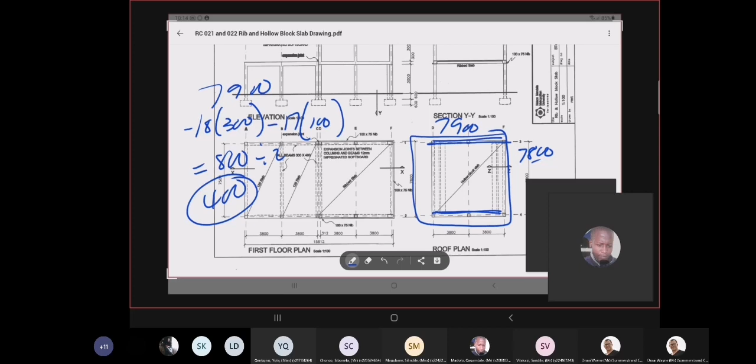And for my slab, on the side of my slab, for the edge of that slab, it will then have my dimensions of 7,900 along the width multiplied by 0.31 times 2, because it will be this side as well as on the other side, and 7.8 times 0.31 times 2.

We then also need to measure the reinforcement that we see in there. We allow an amount for supply and fixing all the steel reinforcement, including cutting, bending, and placing in position, allow for profit and allow for attendance, and that is measured in item.

That, guys, would bring us to the end of measuring this. Now, this is a little bit more intricate, but that we can get as a measure of different sections.

It's highly likely that in real life setup we would get different types of floor slabs, obviously dependent on what the purpose of it all is.

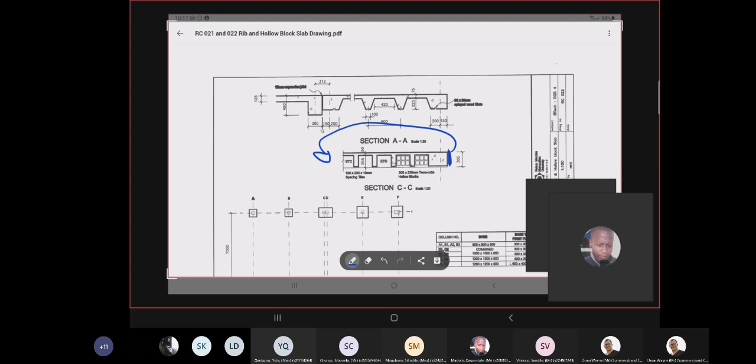Am I talking to myself?

So, can we please go back to formwork where it says extra over formwork for boxing and formwork to soffit of roof slab to form splayed fillet? The 13 there, can you please explain how we get the 13 again?

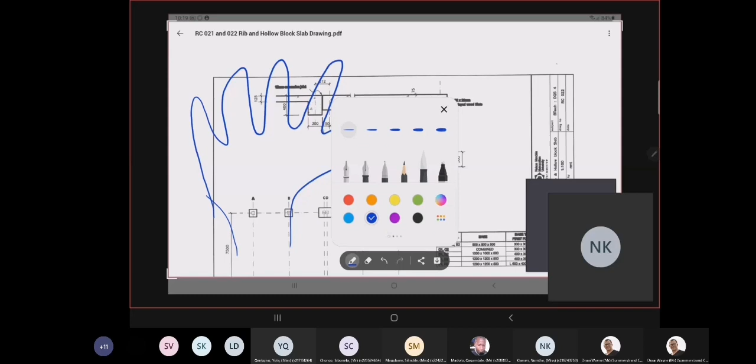Just want to... I'm trying to draw a hand there, Nomta. Okay. Right. Can you remember in first year when you dealt with the measuring of truss system? Yes, sir. Okay. Right.

Now, if you have a look at what are these red circles that I've done there. These red circles will illustrate the troughs. And when you look at that hand that is shown there, if this illustrates the troughs, how many of those boxing in sections would you have when looking at that drawing, taking it into account as well?

Then this would refer to, I can do a different color, would refer to that. How many black dots do you see there? You see 1, 2, 3, 4, right?

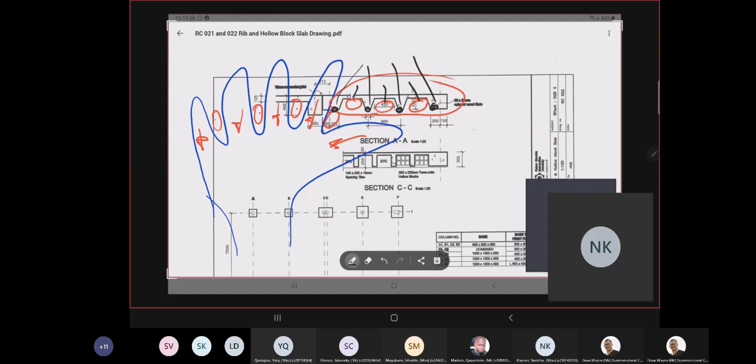And how many red circles do you see there? 1, 2, 3. What does it say to you? It says to me that for every trough I have, I should have one more rib. You hear what I'm saying, Nomta?

Yes, sir. Do you now understand where we get the 13 from? Because we calculated and we determined that there were 12 troughs.

Okay, so if these are if there are 12 ribs or troughs, 12 troughs. If those are the troughs, how many ribs would there be? Or how many of these boxing in sections would there be?

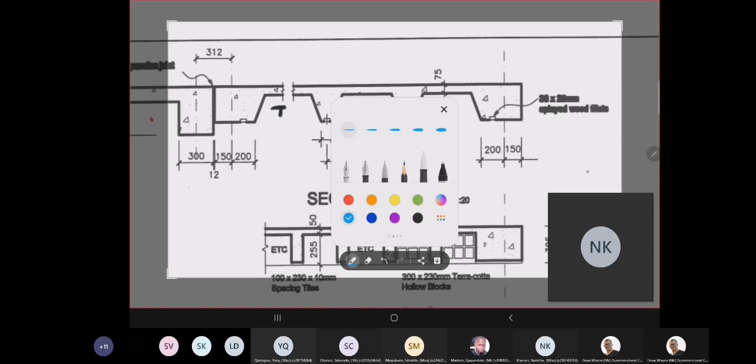And if I can blow this up, you can see there, if that is the trough, if this is the trough, and we show where those fillets should be, can you see that there is one more, because the number of the troughs, we added 1 as it would reflect that we

need to have the fillets on the outer side of each and every trough. You see that, Nomta? Yes, sir. Does that make sense to you? Yes, it does. Thank you, sir.

Okay. Anyone else? Okay, sir. I also have a question. Who's that? Thursday. Yes, sir.

Sir, this concept about the spacing tiles, I didn't understand it so well, sir. What is this spacing tiles? Okay, Tesby, let's have a look there.

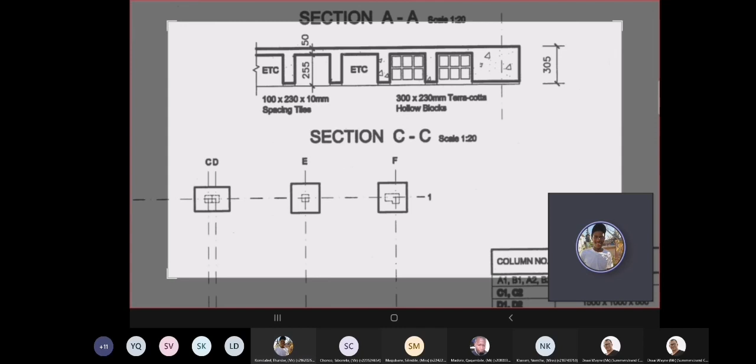The spacing tiles is not really a concept that is really being used. If you have a look at what we've done previously, the spacing tiles, Tesby, would go at the bottom there. But as I indicated earlier, if you do not measure it, I will not penalize you if you do not measure it.

It is spacing tiles. It's what goes in between, ensuring that the concrete and all the hollow blocks do not stick, and that we can strip out the formwork properly and all of that. So if you do not measure those, if you only measure the reduction of the blocks, I'll be happy with that. I will not penalize you because of that.

So it's not tiles exactly, sir? No, it's not tiles. It's just spacing tiles. A spacer. You know what a spacer is? Yes, sir. So it's like spacers that we put in there to ensure that it stays in place, that we do not lose, or that it does not stick and all of that.

So it's basically to ensure that our thickness remains the same. Okay, thank you sir, I understand.

Okay. Anyone else? Well, what I can also say is that next week's test will not have an intricate drawing such as this one. That much I can say. Anyone else?